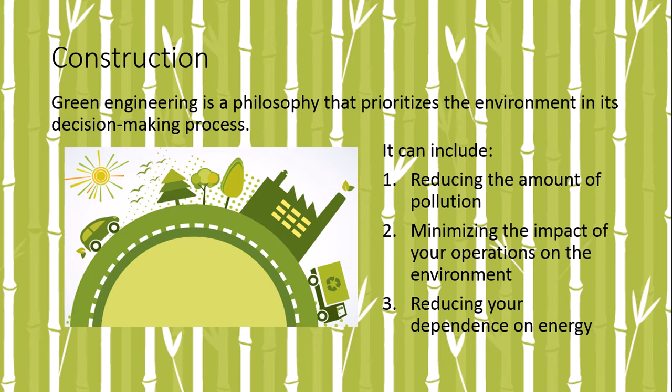Engineers look at the system and make suggestions for improvement. Many civil engineers use a combined heat and power system to capture the heat produced by generating electricity and redirect it into the building. Modern society.

They are using toxic materials that are damaging the environment by generating excessive amounts of carbon monoxide. The growth in the construction industry depends upon depletable resources that are damaging the environment. Harmful materials have to be avoided in order to maintain good quality. Non-renewable resources have to be conserved in order to reduce the impact in the elaboration of materials.

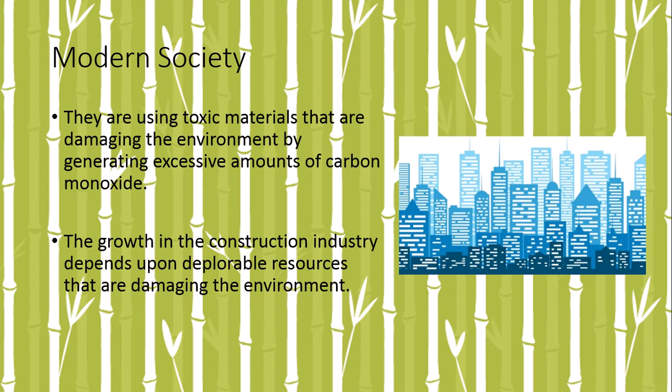To improve human health, people should use eco-friendly materials. We should aspire for renewable energy to be harvested on site and protect and restore local air, water, soils, flora, and fauna.

Some of the materials being used in construction are PVC, lead, mercury, and flame retardants. PVC has been used extensively in a wide range of construction products for over half a century. PVC is being used in pipes, windows, flooring, roofing, inflatable structures and lighter structures.

Lead is a very heavy metal that has been in industrial use for thousands of years. It is pale silver gray when freshly cut, but it darkens on exposure to air. It is heavy, malleable, and a poor conductor of electricity. Lead may be used in its pure elemental form or combined chemically with other elements to form lead compounds. Inorganic lead compounds are used in pigments, paints, glasses, plastics, and rubber compounds.

Mercury does have remarkable chemical properties that humans have exploited since antiquity. The original method for making PVC required mercury to catalyze the reaction. Mercury is also being used in compact fluorescent light bulbs and paper mills.

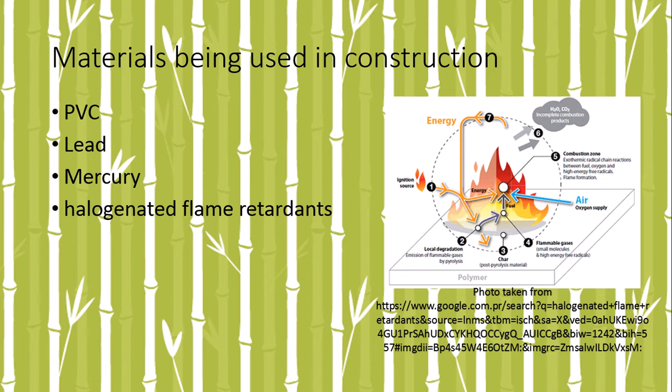But what is the problem here? Materials that are currently being used generate a lot of waste and affect the lives of humans. Aluminum and steel are frequently used in construction and have the most embodied energy because it requires a lot of energy to produce them, compared to timber that requires much less energy for production.

We need to create a more efficient way of designing in society. The excessive amount of energy required to create materials led to new techniques to conserve and use natural resources. The potential of the earth and various elements of nature gave direction to the concept of green buildings.

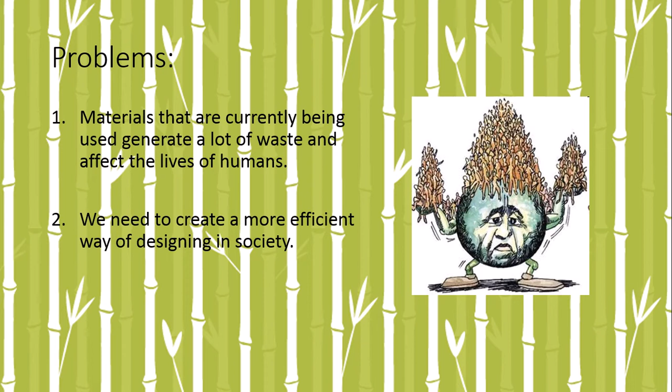As an aspiring civil engineer, I started thinking about how reduce, reuse, and recycle could be applied to what engineers mostly do. If we first reduce, then we spend less time, money, and energy trying to reuse and recycle. Reusing is one of the best ways to limit the environmental degradation caused by the elaborating process. In addition, we could take advantage of existing buildings and limit the impact associated with transportation.

Recycling can reduce raw materials consumption and energy use. The best way to reduce environmental problems is to use materials with low VOC emissions, use materials that prevent leaching, and use materials that reuse waste.

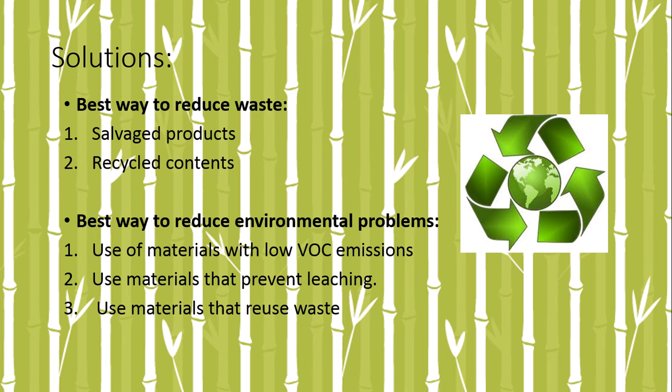Recycled materials that can be used in the design are asphalt pavement, fly ash replacement in concrete, and recycled rubber. By doing this, we are encouraging recycling of materials and reducing raw materials extraction and energy.

Almost all projects require some sort of demolition or clearing. Rather than hauling off this waste, we should consider the opportunities for recycling that waste. For example, demolished concrete can be used as base for paved surfaces, cleared trees can be chipped on site and used for erosion control or landscaping, and demolished asphalt can be recycled into new asphalt surfaces.

Another way that engineers create opportunities to be greener is to look at the manufacturing process, also known as dematerialization. This process reduces the resources that go into the system, which reduces the energy use and the carbon monoxide footprint. This is what we call an eco-friendly material.

What is eco-friendly? This term refers to products that claim to reduce or have no harm upon the environment. An eco-friendly building material is one that increases the efficiency of energy used and reduces impact on humans and the environment. Green technology can help achieve sustainable development by reducing energy consumption to a large extent, also improving the return on investment by reducing maintenance.

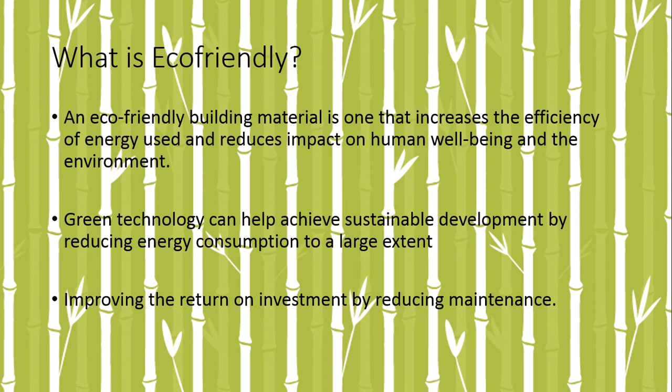Why do we need to use eco-friendly materials? Well, the ultimate goal is to reduce the carbon footprint. Buildings are being designed with better insulation, water management, and low electricity consumption. Also, renewable energy is being harvested on site by making use of solar energy and wind power, which in turn helps in reducing electricity costs.

Materials can be eco-friendly if they can assist in reduction of the energy used in the buildings during operation and maintenance.

As you can see in this diagram, it explains the eco-friendly materials and techniques. One of them is reuse, recycle, and embodied energy. Also, the reuse of waste products.

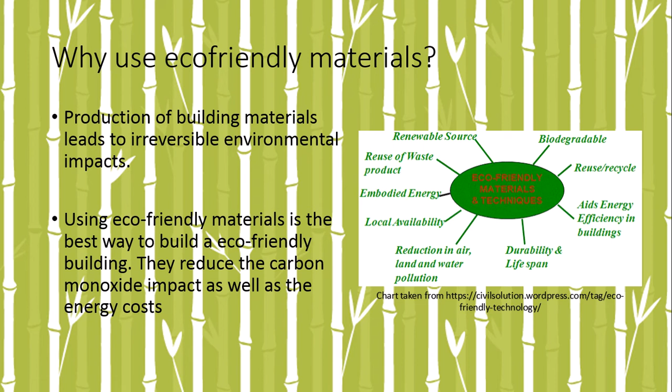There are a lot of products that can be used to help reduce environmental problems. Some of the materials that can be used are bamboo-based particle board and plyboard, bamboo matting, sun-dried brick, precast cement concrete blocks, lintels, and slab, structural and non-structural modular elements, calcium wall panels, calcium silicate boards and tiles, and cellular lightweight concrete blocks.

Some great choices for eco-friendly flooring are cork flooring, bamboo, and recycled wood flooring. Cork flooring is a great alternative to wood. It is environmentally friendly. It only uses the bark from the tree and does not kill the tree as a result of harvest. The bark is a great renewable resource and it grows back completely within 9 years. Cork flooring is very comfortable, durable, and insulating, and can last for many years.

Bamboo is another great choice for renewable resources. Bamboo is not a wood at all, but rather a grass that only takes 3 years to fully mature. When processed, bamboo can have an attractive appearance similar to wood flooring. It is a very strong and durable type of flooring and performs very much like a traditional hardwood floor.

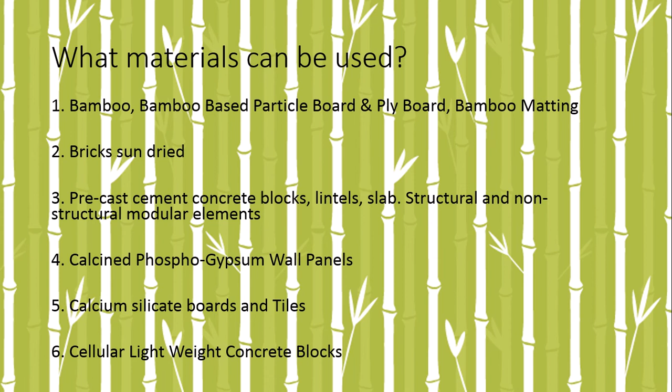In the end, I wanted to design a more eco-friendly society that allows humans to live healthily. I chose this solution because we live in a society that takes environmental conditions for granted. It might come to a point in which Earth might not be able to sustain life anymore. And that is really scary.